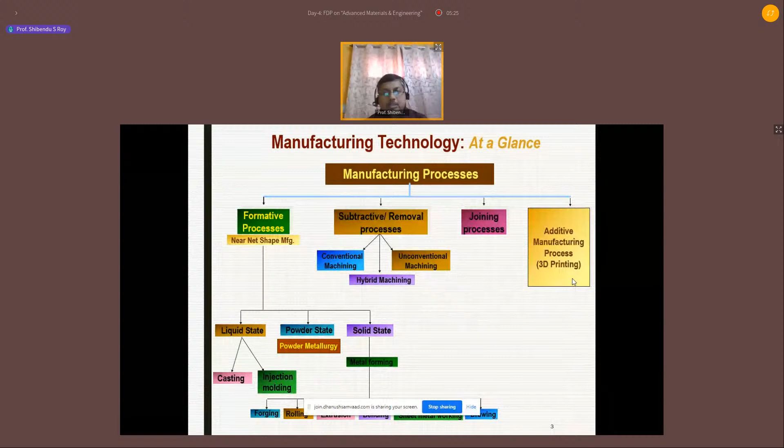Additive manufacturing is the youngest member in the family of mechanical manufacturing processes. It was previously known as rapid prototyping, but now, as per ASTM, its name is additive manufacturing, popularly known as 3D printing. Today's topic is on additive manufacturing or 3D printing processes and the corresponding materials used for this process. This is one of the disruptive manufacturing technologies in the modern era.

Once upon a time, it was a dream for designers or manufacturing technologists to develop a technology with the potential of directly converting CAD data into a real object—a technology that provides the bridge from product conceptualization to product realization in a reasonably faster manner. Now it is a reality through the additive manufacturing process.

It is a process of joining materials or adding materials to create an object from a 3D CAD model, usually layer upon layer. It is opposite to the subtractive manufacturing methodologies. So in additive manufacturing, materials are added and joined layer after layer.

It is very close to the way nature manufactures many things. If you see the bank of a river, you can see that years after years, soil has been deposited and has formed a kind of landscape or island. This is basically nature-manufactured, nothing but adding soil layer after layer. Similarly, in nature, plants, animals, insects, even human beings are basically developed by adding material, not by subtracting material.

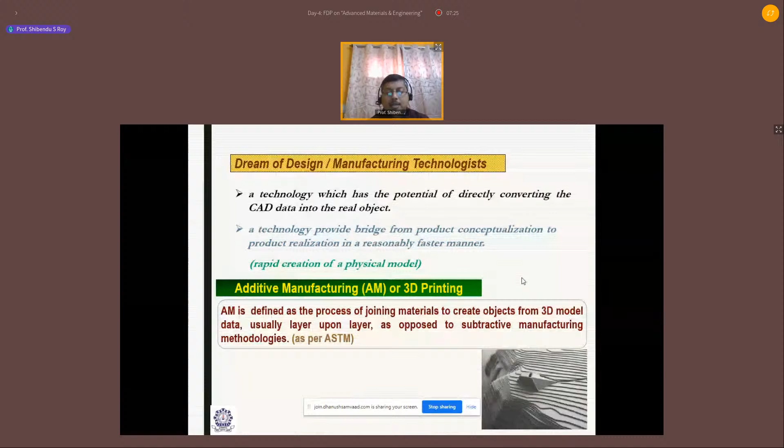Now, if you compare additive manufacturing with subtractive manufacturing, it will be clear that in subtractive manufacturing you have to take a bulk material and give it the desired shape and size by removing material. That removal of material to give the desired shape and size is basically wastage. Most of the time some portion can be recycled, but you can treat this as wastage of material.

In case of additive manufacturing, you add material wherever required, depending on the cross-sectional information. Wherever it's required, you add material, and that is why the wastage is less. This is one of the important benefits of using additive manufacturing.

Now, what is the basic principle of additive manufacturing? It's similar to the way you create a sculpture surface. You can create the sculpture surface by removing material—you take a bulk rectangular piece of material and remove material by a machining process, or by casting, where you develop a mold and do the casting process.

But the other way, you can also develop it like this: you take each cross section, each with a different geometry, cut a cardboard for each, and glue them one after another according to the shape. By adding this cardboard-like layer and gluing one after another, you can develop the 3D object. This simple principle is used in additive manufacturing.

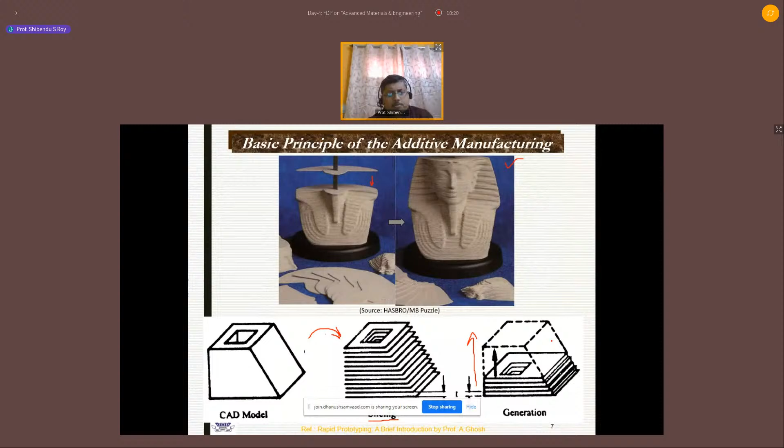This simple principle is used in additive manufacturing process. The same way nature is also developing, adding material layer after layer from bottom to top. Reverse way also you can do nowadays, but generally it is bottom to top.

Now, what are the steps involved in additive manufacturing? First, you have to develop the 3D CAD model of an object. Then you have to convert it into the neutral file format, the STL format.

Then you have to generate the support structure. For overhang structures, you have to put a support, and the support should come from the bottom. For example, whenever you develop a water tank or any cantilever kind of thing in civil structure, you have to give support of different structural members, like scaffold using bamboos or metallic pipes. Similarly here, if there is any overhang structure, you have to give the support in the CAD model itself, you have to design the support.

After designing the support, you have to slice. Slicing means it is the intersection between the solid and the plane. Ultimately, you get the cross-sectional geometry that will be stored into the CAD database. Depending on the height, a particular object may be sliced into, say, 1,000 layers or maybe 50,000 layers.

So slicing means you're converting the solid model into a number of 2D geometries, and that will be stored into the CAD database, and fed to the machine. According to the cross-sectional information, the machine will deposit material over the build platform layer after layer, and it will create the object.

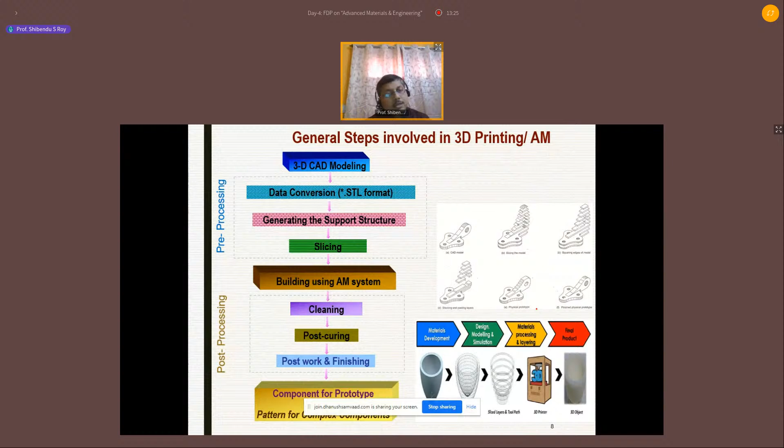Now, if you compare 3D printing, additive manufacturing, also known as 3D printing, with the 2D printing process, as you know, in 2D printing we use it in office and at home. In a 2D printer, we develop a digital model, either in Word or PowerPoint or Paint, whatever it may be. That is fed to the printer, and in an inkjet printing system, there is an ink head.

The head is inside, and it will move in, say, the X direction, while the paper moves in the Y direction. One single layer of ink will be deposited. There's a tiny nozzle, an array of tiny nozzles, through which nano droplets of ink are deposited, and printing is over for only one layer. So there are two movements, X and Y.

In case of 3D printing, you have to develop a 3D CAD model, slice it, and feed it into the machine. Here there is a build platform. Over the build platform, according to your cross-sectional information, since you have already split the model into a number of cross-sections, there is a head, a nozzle, through which material will be deposited.

That head will move in the XY direction, moving in the X direction as well as the Y direction to deposit the material over the bed. Like this way, it will deposit the material. Once one layer's deposition is over by the XY movement of the print head, the build platform is lowered down.

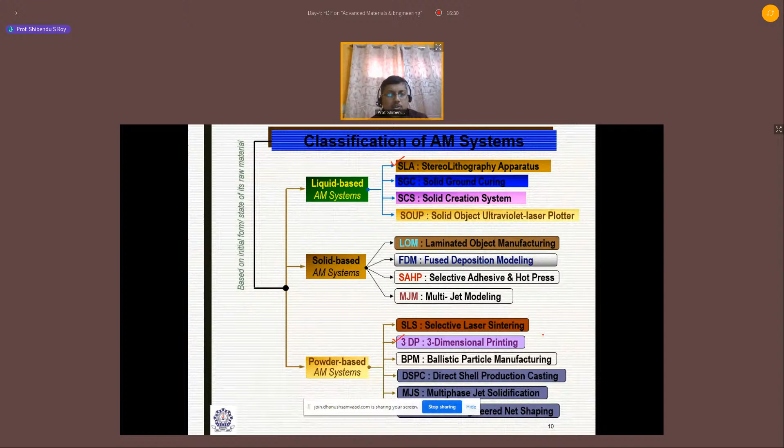But this classification is no longer valid now. As per ASTM, additive manufacturing processes are classified into 7 groups depending on the methodology used for adding material layer after layer. These are: photopolymerization, sheet lamination, material extrusion, binder jetting, powder bed fusion, material jetting, and directed energy deposition. So these are the 7 categories of additive manufacturing process.

I would like to discuss the methodology used in these 7 categories, what materials are used, what are the advantages, disadvantages, and limitations, and what type of research is required regarding the materials or material bonding. So that particular part we like to highlight here.

Now, material for additive manufacturing is used in three categories based on initial state: liquid-based materials, solid-based material, and powder-based material. In liquid-based, there are different types of resin and photopolymer used. Liquid material is used in SLA, SGC, SCS, and SOUP.

There are different solid-based materials, in the form of wire or in the form of a sheet. That is the solid-based material. It may be made of polymer or metal—stainless steel, titanium, or any alloying material. It can also be in sheet form, either paper, polymer sheet, or ceramic sheet. So there are different kinds of sheets used.

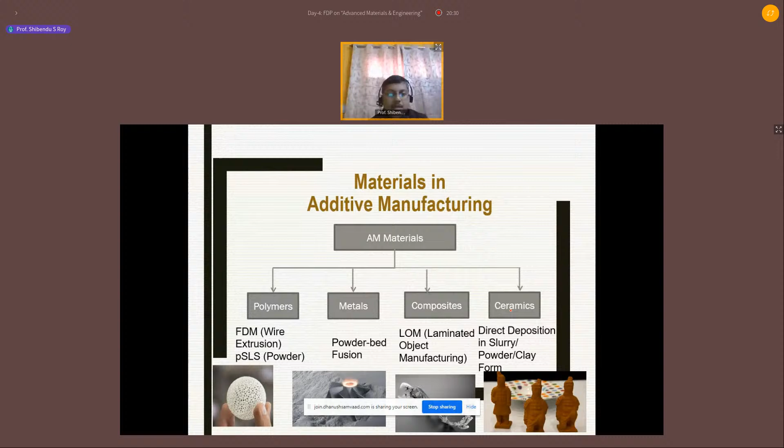Now I would like to show you some applications of the additive manufacturing process. After that, the principle. So quickly, I would like to show you this.

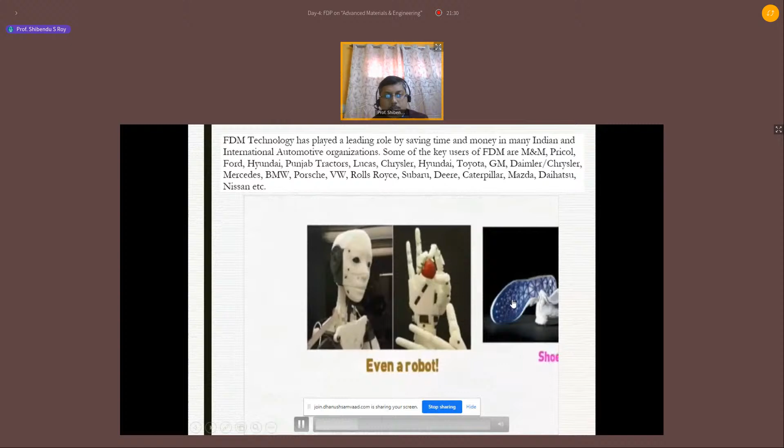You can use 3D printing for art, prototype development, architecture, clothes development, furniture, and lots of gear you can manufacture. Fashion accessories, biomedical prosthetics, in the shoe industry, you can even develop your own robot. So possibilities are unlimited.

Hello, am I audible? Yes, sir, we can hear you. Are you getting the sound of the videos? I'd like to demonstrate that. I don't know whether you're getting the sound. Yes, sir, we are getting sound also.

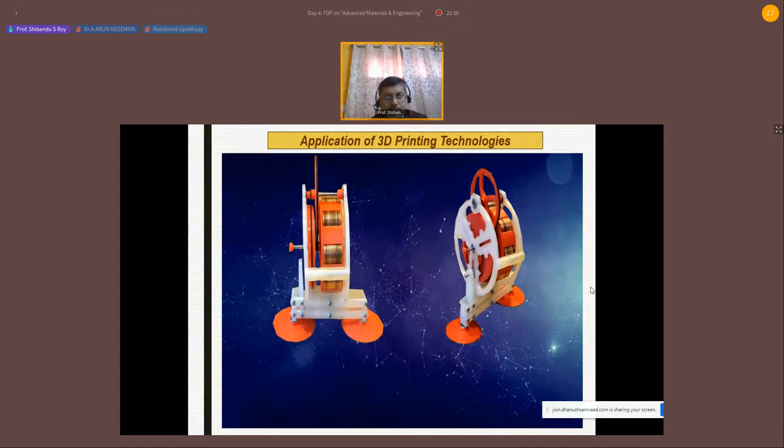So let's take a look at the best 3D printed creations. At number 10, the walking gyroscope, invented back in 1980. Most of the parts of this gyroscope are developed by 3D printing. It houses a spinning gyroscope geared to a pair of walking feet. You can even build your own, since the 3D model can be found on Thingiverse.com, so check the description and click the link to this 3D toy.

At number 9, the CNC multi-tool machine. Although it's not quite a 3D printer, this CNC machine is mostly made from 3D printed parts and is a lot cheaper than your average machine. It can work with woods, plastics, and even some metals. Make sure not to incorporate an AI program into your next 3D printer and create a robot revolution. Like the last object, it can be found on Thingiverse.com.

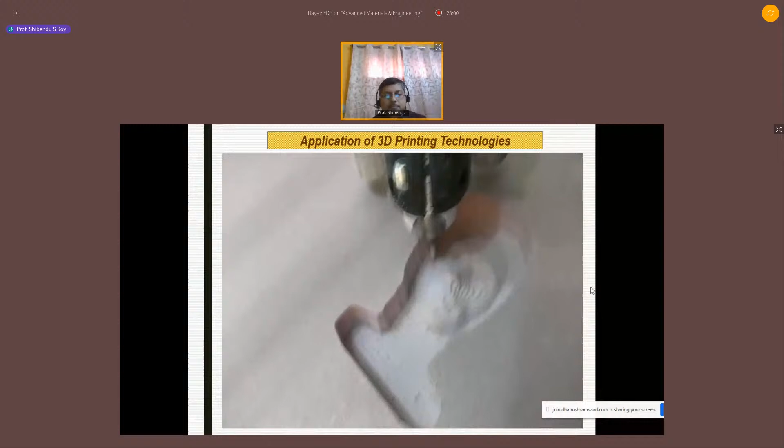At number 8, the Cortex cast. This exoskeletal cast is designed to replace usual plaster forms. It is fully ventilated, super light, shower friendly, and stylish. An injured patient would first undergo an x-ray and then a 3D scan, and then a fully custom 3D cast is printed out. This is definitely innovative and very beneficial to people dealing with an injury.

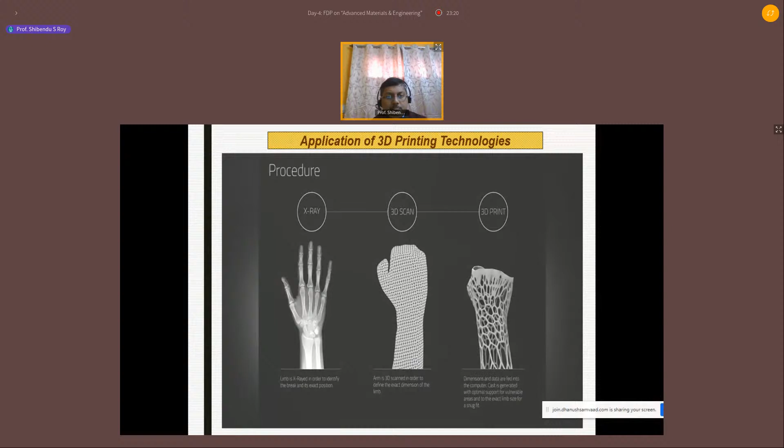At number 7, the dodecahedron speaker. With 3D printing on your side, building a complex speaker box becomes fairly easy to do. This 12-speaker array gives off great sound while being exponentially cheaper than some of its commercial counterparts. I expect to see and hear pretty cool 3D printed speaker housings in the near future.

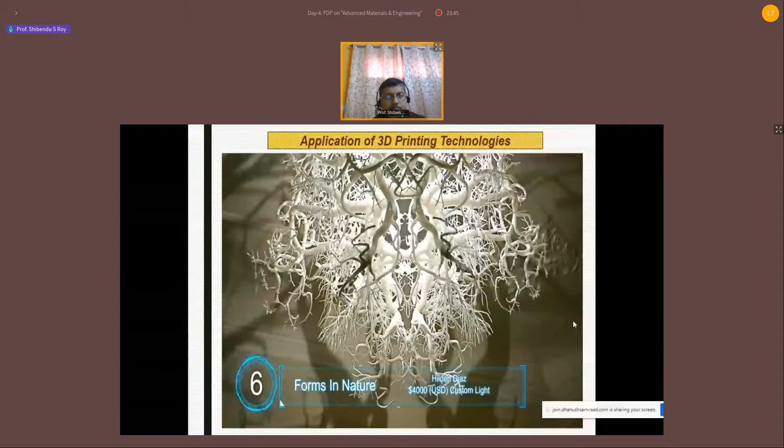At number 6, the Forms in Nature light sculpture. This unique light casts 360-degree shadows onto its surroundings, giving the illusion of being in a forest. New custom 3D lights are being designed and developed all the time, including this Minecraft cube and this jellyfish lamp. So lighting possibilities are endless when it comes to 3D printing.

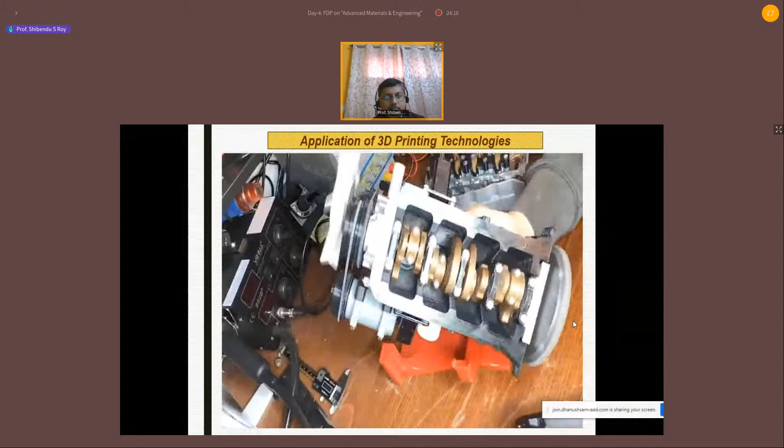At number 5, the 3D printed 22RE 4-cylinder engine. This does not run on fuel like the real engine; it's actually a replica composed of many 3D printed parts. Built by Eric Harrell, you can visit Thingiverse.com and print your own replica engine, but it'll likely take you over 70 hours to print. Every part moves, and it's driven off an electric motor. And if this is not crazy enough, the same creator even built replicas of a 5-speed transmission and a transfer case. So that's pretty crazy.

At number 4, the Local Motors 3D printed car. Most of this car is composed of ABS plastic reinforced with carbon fiber. Its frame, exterior body, and interior features only take about 40 hours to be 3D printed. Its mechanical components, consisting of battery, suspension, and brakes, are not 3D printed but added on after. It's a fully electric car with a top speed of 50 miles per hour, expected to be released next year. At number 3, a real 3D printed jet engine.

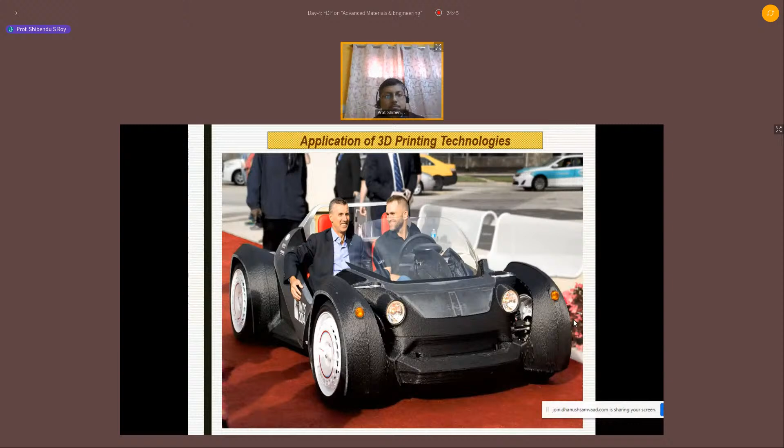The metal 3D printing engineers at Monash University created this new engine, proving that 3D printing methods can cut costs and production times. Its creators are hoping to test fly a prototype within 10 months. If everything goes well, commercial certification will be awarded in the next 2 years. 3D metal printing is fairly new and will not only improve engine building times for the aviation industry, but also for the automotive and marine sectors.

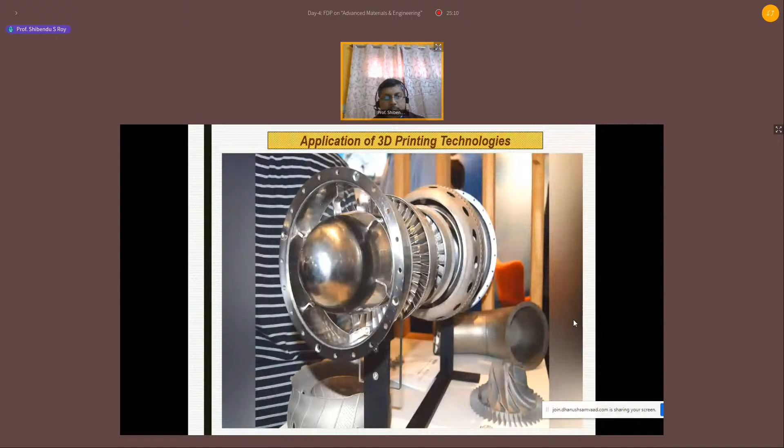At number 1, the 6-story printed apartment building, built in China by WinSun. It's a 3D printed structure. Such type of building can also be developed in India, as in the last few months, through additive manufacturing or 3D printing processes.

Now I'd like to talk about the oldest of the old additive manufacturing processes, laminated object manufacturing. Quickly, I'd like to tell you about it.

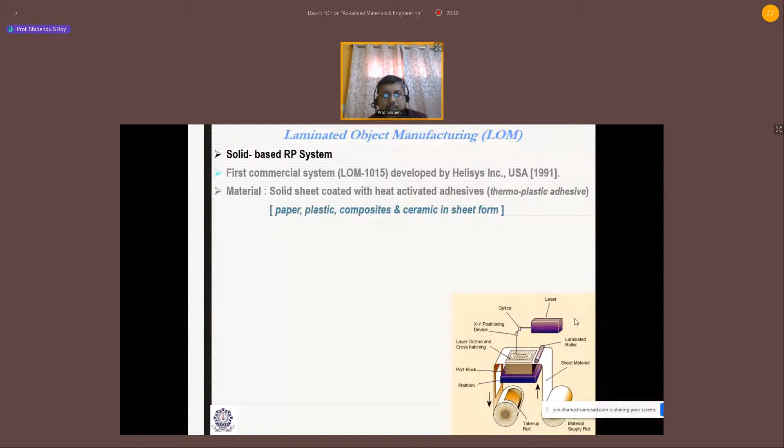The material used is a solid sheet coated with a heat-activated glue, or thermoplastic adhesive. It may be paper, plastic, composite, or ceramic in sheet form, with thickness 0.05 to 0.25 millimeters.

The process involves laser cutting and lamination by hot roller compression. The laser used is CO2. Here is the build platform, the roll, and the take-up roll placed over the build platform. This is the laser, which has XY control.

According to the cross-sectional information of the object, the laser traces the path. It traces the cross-sectional outer boundary, inner boundary, and an outermost rectangular boundary, which is required whenever the platform is lowered down. The whole rectangular portion lowers with the platform, and you see the unwanted portion. Only the annular circular portion is the actual cross section, the rest is cross-hatched so that the unwanted portion can be easily removed.

Once one layer is over, the platform lowers down equal to one layer thickness, and the take-up roll starts so a fresh paper comes over the previous paper. The hot roller moves over it, applying temperature, heat, and pressure. Below the paper, on the backside, there is a glue—the thermoplastic adhesive. Because of the pressure and temperature, it activates and adheres to the previous layer.

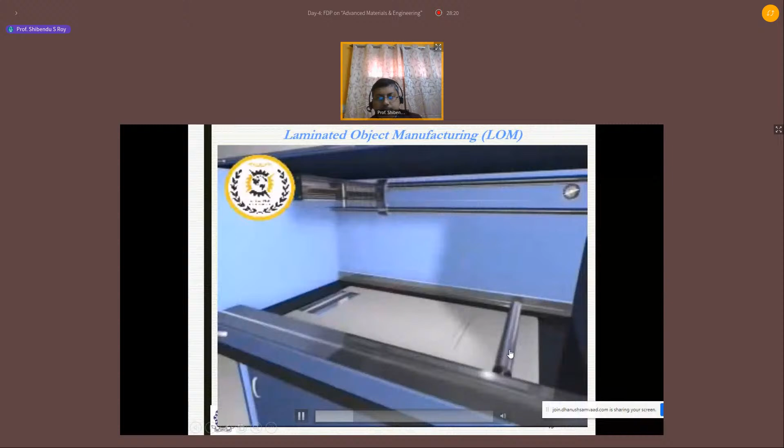Quickly, I'd like to show you this process: the tracing of XY movement of the laser, hot lamination, laser cutting, then the fresh paper and pressing—this is basically the lamination process.

Ultimately, you get something like this, and because of the cross-hatched small tiles, you can easily remove the unwanted portion. For example, you get this box and can remove the unwanted portion this way to get your part. But here the material wastage is more, which is why this process is now obsolete.

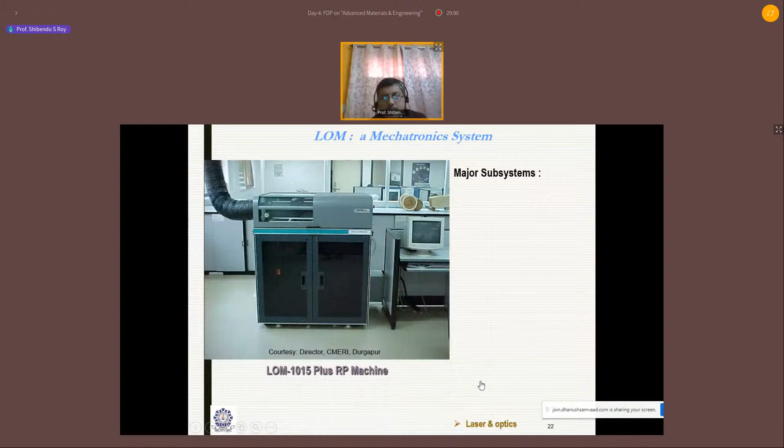This is the machine which was procured in this same area, Durgapur, long back in the year 1998. This is the LOM process. Now let's look at the modern machine.

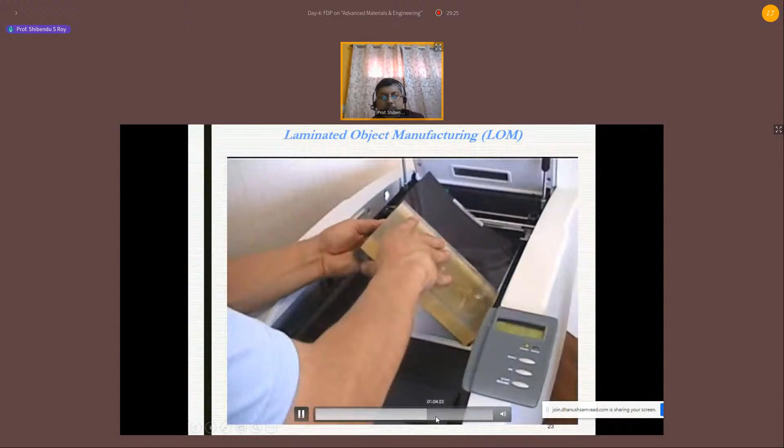The modern machine is like this. Here you see the XY movement, and a plastic sheet is used. Once it's over, with layer by layer addition, you get this, remove the unwanted portion, and ultimately get your object.

Now I'd like to tell you about the first additive manufacturing method in the world, using the photopolymerization process. This is stereolithography apparatus, SLA, developed by Professor Hull, who commercialized it in 1988. He is the founder of 3D Systems, and this is the first additive manufacturing machine, or first 3D printer, in the world.

This is a liquid-based additive manufacturing process. Photocurable resin is used, either epoxy resin or acrylate resin, and a laser is used for curing.

Now let's look at the process—it's simple. This is the build platform, initially positioned at this point, with one layer of liquid resin over it. According to the bottommost cross-sectional information, the laser traces the path.

In this case, the laser doesn't only trace the outer path, it also traces inside, so that due to the interaction of the laser and the liquid resin, the photopolymerization process starts. Because of this, it cures the whole desired cross section, while the other portion remains uncured polymer over the build platform.

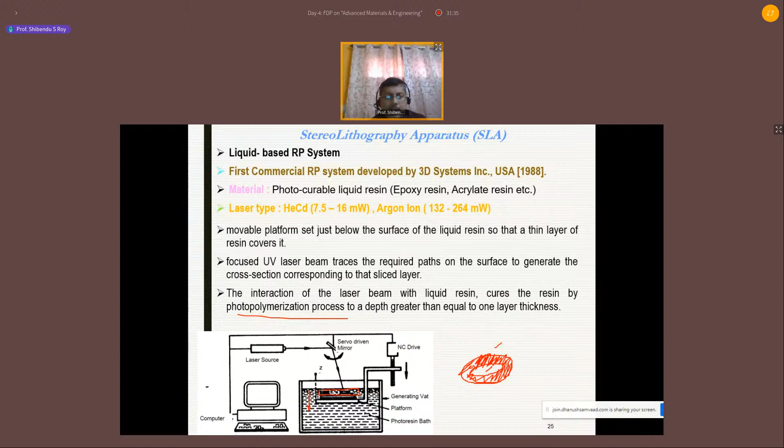Once one layer is over, the platform is lowered down equal to one layer thickness, and the liquid resin from the surrounding will cover the previously cured layer. In order to uniformly distribute resin over the previously cured layer, a wiper blade is used. Once the second layer is ready, the laser will trace the cross-section according to the second layer's information, and laser power is controlled so it not only cures the second layer but also creates bonding between the second layer and the first. This process continues till the topmost layer is reached.

And this is the machine, and I can show you a little bit of this.

See, this is the laser tracing taking place. You just see the laser tracing, then the platform is lowered down, then the wiper blade moves, then again the second layer is traced, and this process continues till the topmost layer comes.

Once it is done, the platform moves upward and the partially cured solid object is obtained. Now you have to do some post-curing operation to make it fully cured, and these are the products developed by the SLA process.

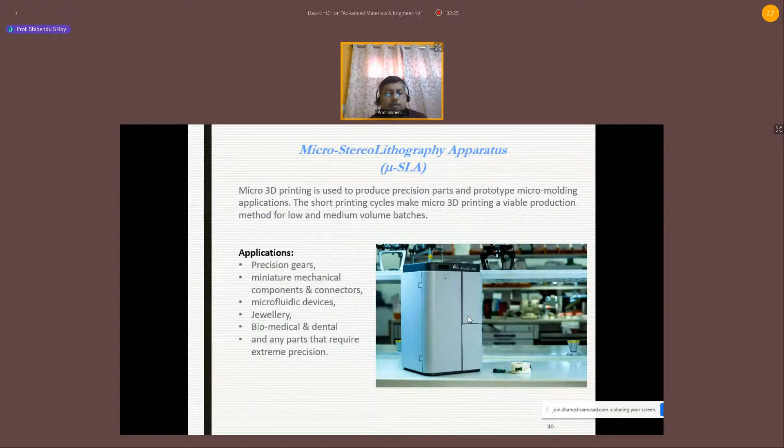So these are the micro SLA, micro parts, like biomedical parts or precision gears, manufactured by the micro SLA process. I'd like to show you examples of micro SLA.

So it is mostly used in dental applications.

Next, a very common additive manufacturing process is the material extrusion based method, FDM, fused deposition modeling. Most colleges and academic institutes have this one because it's relatively low cost, and it has relatively low running or recurring cost.

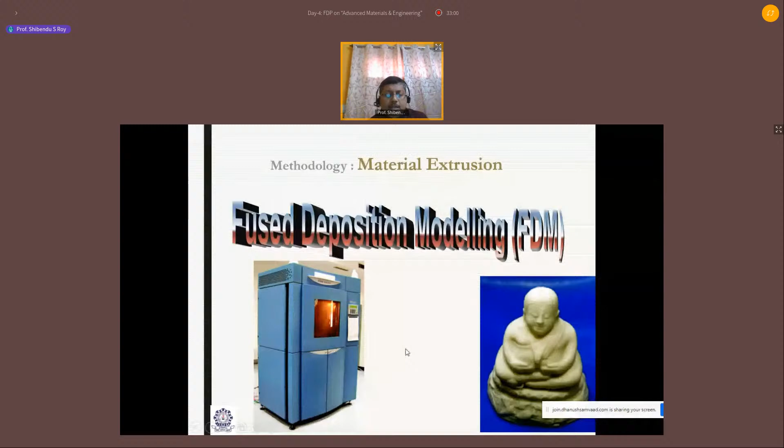It is a solid-based additive manufacturing method. Here the material used is different kinds of polymer, ABS or PLA or any kind of elastomer. The first machine was developed by Stratasys, and I'd like to explain the basic process here.

This is basically the nozzle, the building nozzle, and the input material is in the form of a filament or wire. The diameter is 1.75 millimeters, and that is fed into the temperature-controlled, X-Y position-controlled extrusion chamber.

The process is very simple. Because of the feeding roller, the filament is continuously fed into the nozzle, and because of the temperature it becomes semi-solid, and because of back pressure it comes out from the nozzle, which is 0.4 millimeters in diameter. A thin layer is deposited, and the nozzle has to move in the X-Y direction to deposit material according to the cross-sectional information.

Once one layer's deposition is over, the platform is lowered down equal to one layer thickness, then the second layer is deposited according to the second layer's cross-sectional information.

This process is sometimes jokingly called a jalebi-making process. In jalebi making we are doing the same thing - there's a nozzle, a cloth is basically the nozzle with a hole, and by hand we give back pressure and control the X-Y movement to get the desired shape of the jalebi. So it's that simple a process.

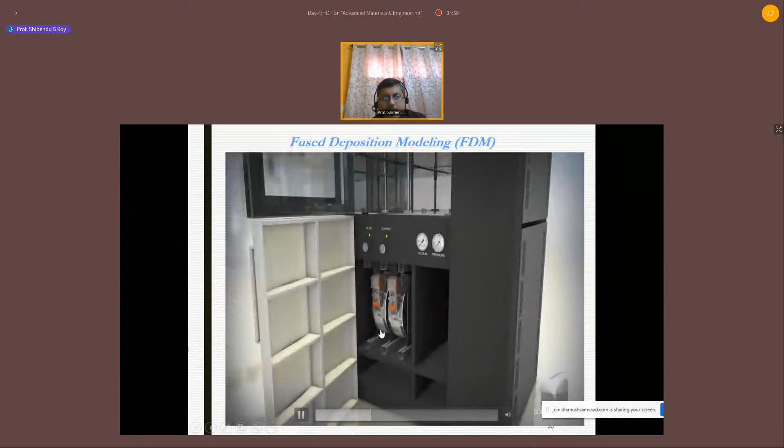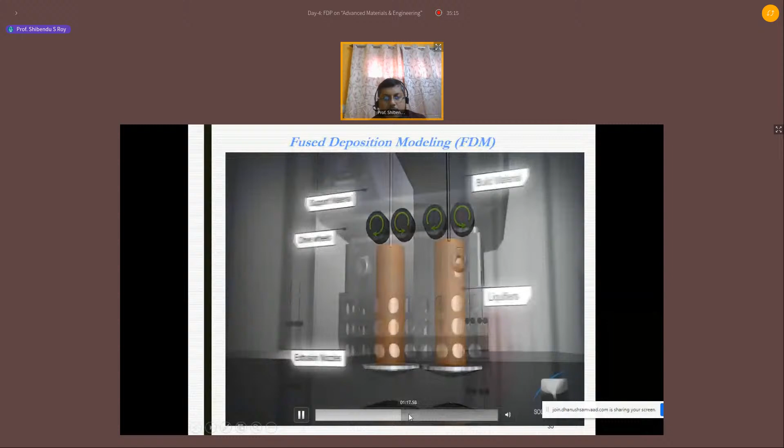One is the build material, another is the support material, which you have to remove. Spools of thermoplastic and support material are used to create each cross-section of the part. Similar to a hot melt glue gun, uncoiled material is slowly extruded through dual heated nozzles. The extrusion nozzles precisely lay down both support and thermoplastic material upon the preceding layers.

So the white one is the support material. See, this is the overhang structure, the black one. So the white support material is required there.

The extrusion nozzle continues to move in a horizontal X-Y plane while the build platform moves down, building the part layer by layer.

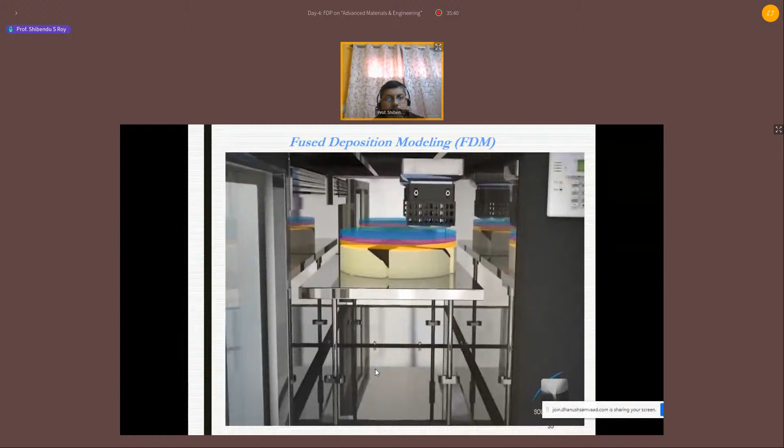The finished part is removed from the build platform and cleaned of its support material, removing the support for the overhang structure. So this kind of post-processing is required.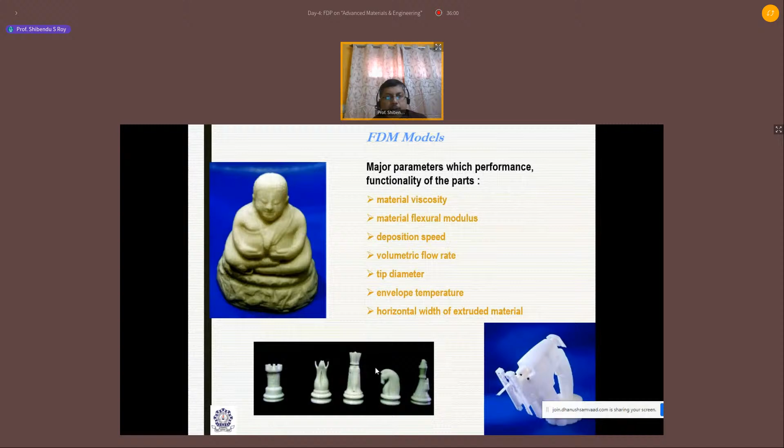The next one is powder-based fusion, one of the most promising additive manufacturing processes - the selective laser sintering process. It is powder-based, using different kinds of powders: polycarbonate, nylon, wax, glass-filled nylon, powder-coated metal, and ceramic. The process is sintering, and it is a very well-known process.

So it will apply focused heat to fuse the powder on the surface, and it will adhere with the nearby powder. This process is similar to SLA, selective laser.

Instead of liquid resin, here it's powder, and the powder will spread. One layer of powder spreads over the build platform, and the laser traces the path in such a way that it sinters the material in that particular layer. Once one layer is over, the build platform is lowered down equal to one layer thickness.

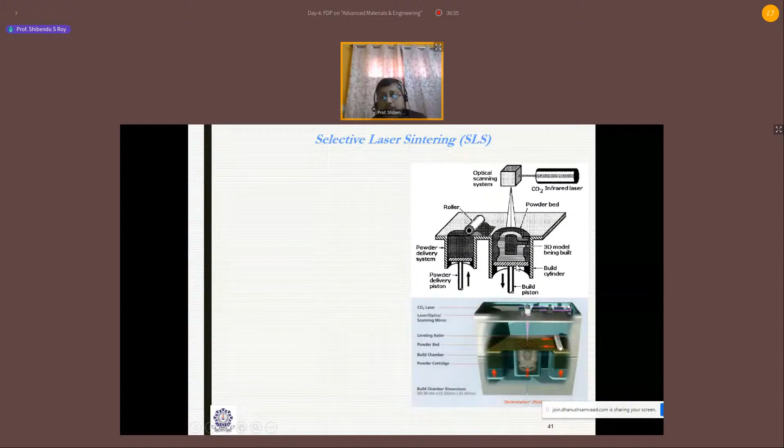Then the second layer of powder will spread. Again the laser traces the path according to the second layer processing information, and laser power is controlled in such a way that it not only sinters the second layer but also creates bonding between the second layer and first layer. This process continues till the topmost layer is reached.

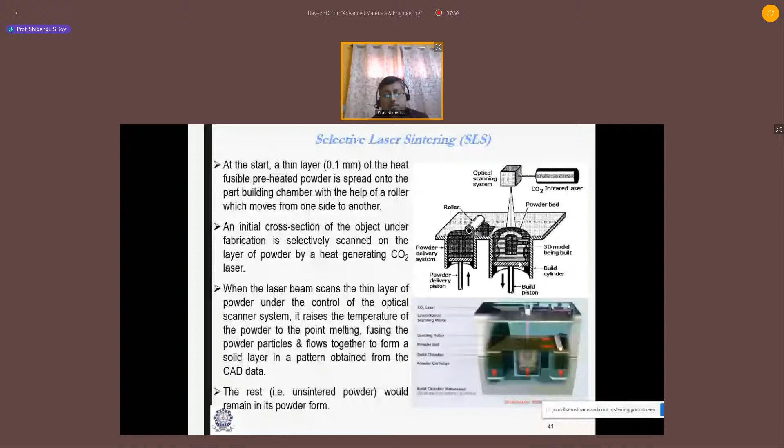So the difference between SLS and SLA: in SLA there is liquid, and in SLS there is powder. The other aspects remain the same, the process remains the same. Unsintered powder could be reused, so the wastage here is very less. I'd like to show you this in the video.

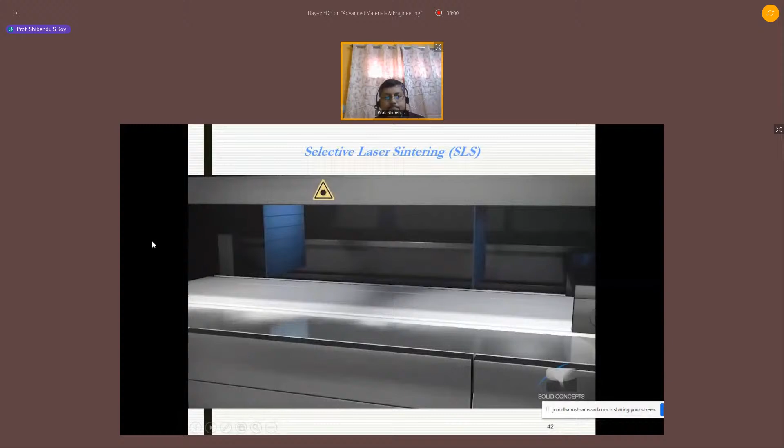Cross sections or layers: the data is then transferred to the SLS additive manufacturing equipment. The machine then begins to create the first layer. After a leveling roller spreads a thin layer of powdered material across the powder bed, a CO2 laser traces the cross section of the material. So this is the tracing material, deposition of powder, then scanning, laser scanning.

Once a single layer is complete, the powder bed is lowered to make room for the next layer. More material is introduced in a powder cartridge and rolled out smooth, while unused material is recycled. The process is repeated, building layer upon layer until the part is complete. So this is the process, layer after layer.

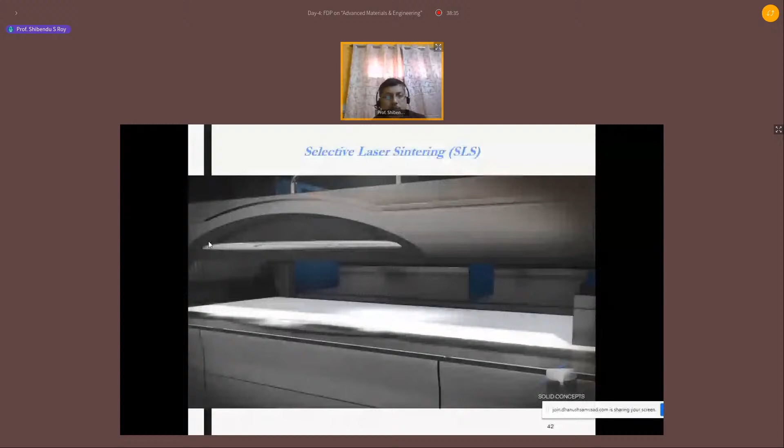These sections act as cross-sectional information fed into the machine, telling the equipment exactly where to sinter. The laser then draws a 2D cross section on the surface of the build material, heating and fusing the material.

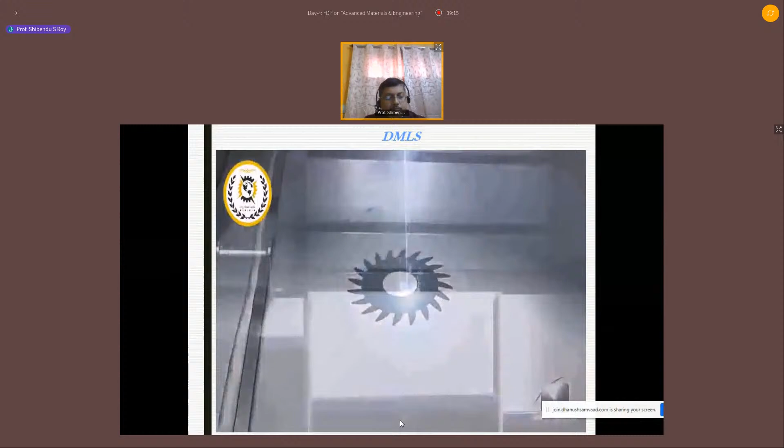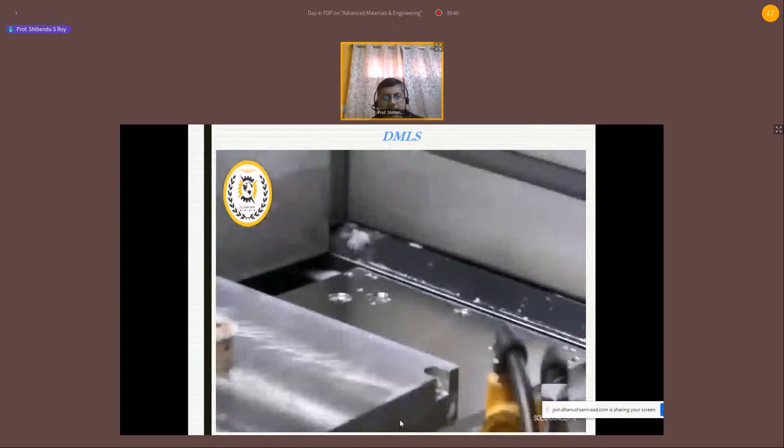Once a single layer is complete, the base plate is lowered just enough to make room for the next layer. More material is raised into the cartridge and recoated evenly on the previously sintered layer. The DMLS machine continues to sinter layer upon layer, building from the bottom up. As the part is built, support structures are added to give supplemental strength, fine features, and overhang support. This way, by adding material layer after layer, you can develop any complex shape object, even a metal object.

So next is the binder jetting principle. Here the difference compared to SLS is that instead of laser, glue will be deposited through a tiny nozzle, and instead of laser fusing, the glue will adhere the powders, whether metal powder, ceramic powder, or any polymer powder. This particular product has been developed by MIT in Boston. As you see, this is the glue depositing head.

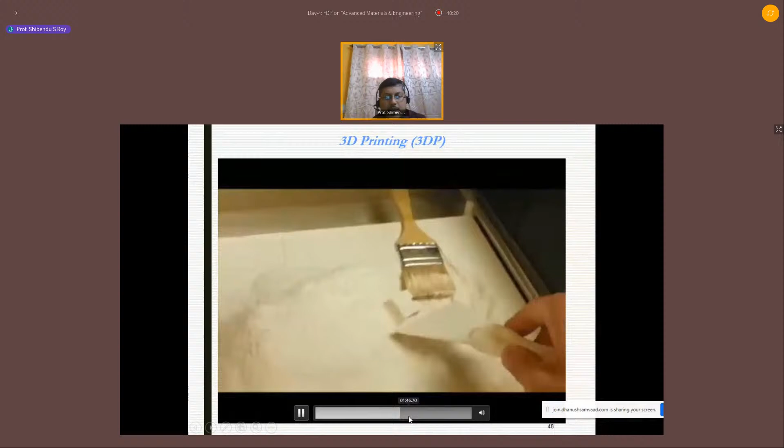Binder jetting principle: instead of laser, binder will be deposited according to the desired cross section. One important application of the binder jetting principle is in the foundry industry. You can develop the sand mold directly instead of making the pattern, which reduces the process cycle. This is one of the very important and promising applications of the binder jet additive manufacturing process, to develop 3D printed sand molds.

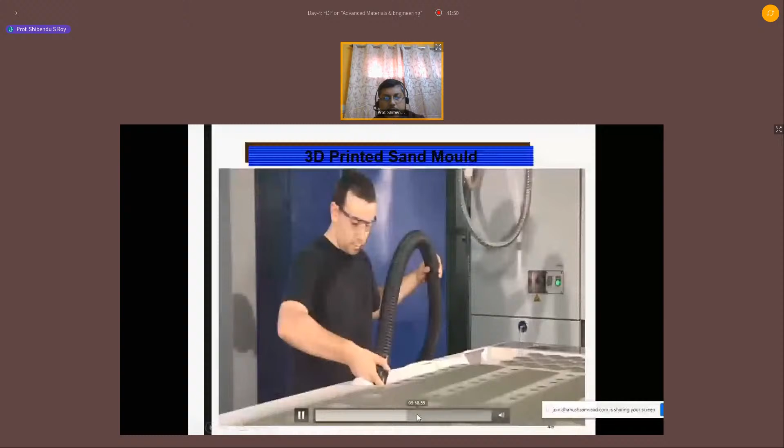I'd like to show you this a little bit. This is the spraying of sand powder. Then, according to the cross-section information, glue is spread over the sand powder bed. This way you can develop the 3D printed mold and carry out the casting operation.

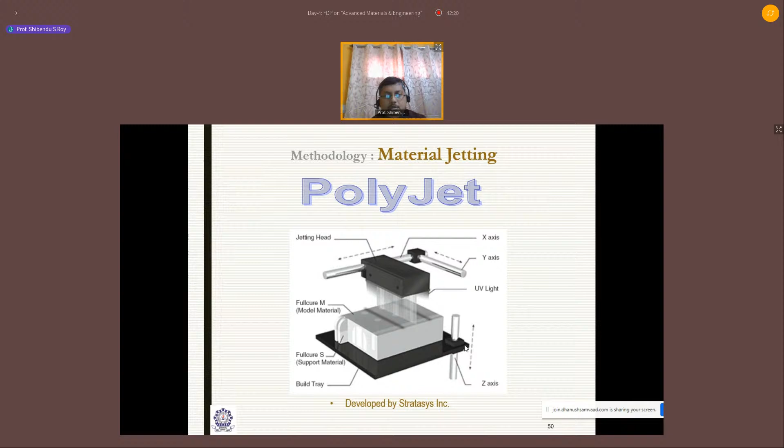So patternless casting is possible nowadays. Next category is material jetting. Here, instead of glue jetting, liquid polymer will be jetted in a controlled UV environment, and as it is deposited in the UV environment, it will cure. This is polyjet, where the material is deposited from a tiny nozzle - the material jetting process.

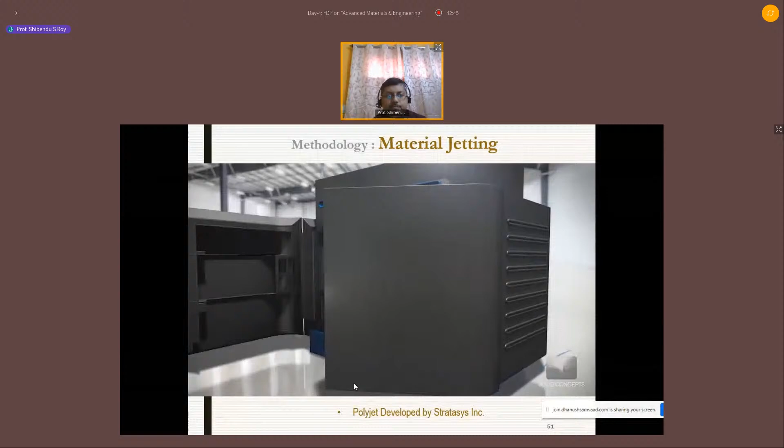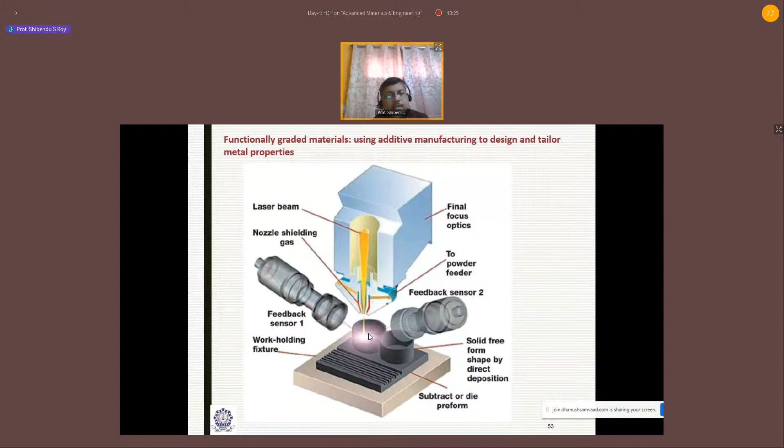Another thing that's very popular nowadays is the metal wire based method. It's basically a welding based additive manufacturing process, known as wire arc additive manufacturing. It's similar to the welding process - metal wire is used along with a welding principle, either TIG, MIG, laser beam, electron beam, or plasma arc - any methodology where the material will melt and deposit. This is wire arc additive manufacturing for metal.

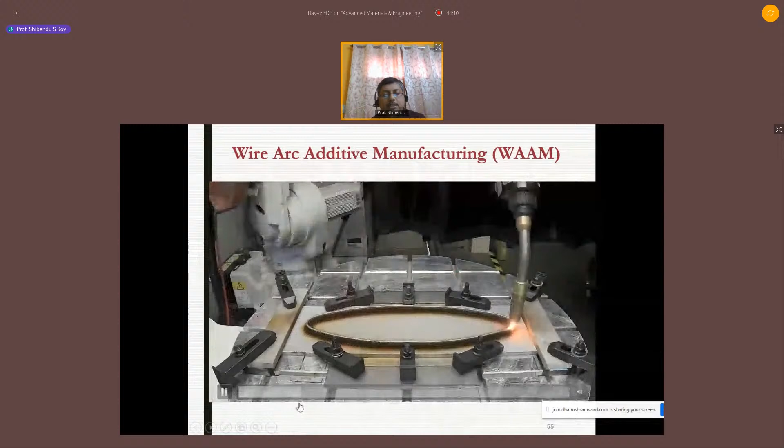So this is the process you just see - the robotic welding process has been modified into the wire arc additive manufacturing process. This is another promising additive manufacturing process where you can make metal parts, or it can also be used for repair of a part. This is an example of robotic additive manufacturing.

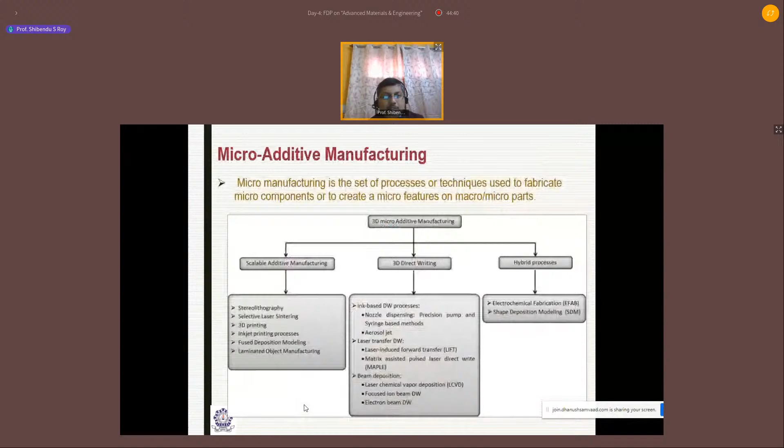I'd like to skip some additive manufacturing for this level. Inkjet printing systems are used in micro and nano additive manufacturing processes for flexible electronic devices, PCB making, and MEMS device development. These are the applications of inkjet printing systems.

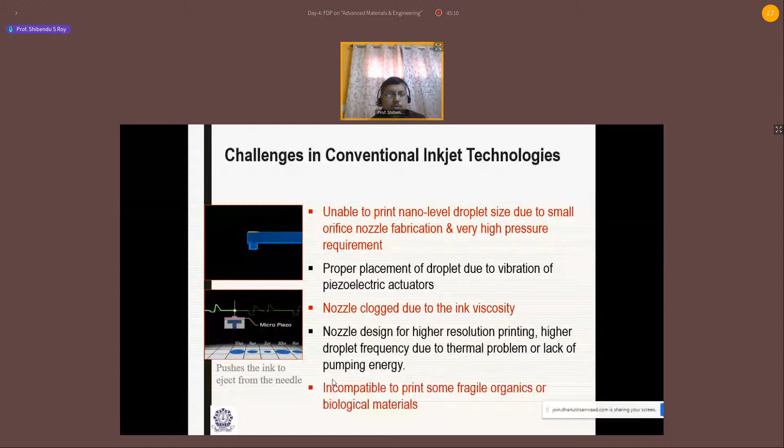Inkjet printing systems include thermal inkjet and piezo inkjet - we have developed one setup. This is an example of the piezo inkjet principle, but there are drawbacks in conventional thermal and piezo inkjet that can be eliminated by electro-hydrodynamic inkjet printing. We developed this setup in our DST project in collaboration with CMERI Durgapur and NIT Durgapur. In this process, an electric field is used between the nozzle and substrate to pull ink from the nozzle and create nano droplets.

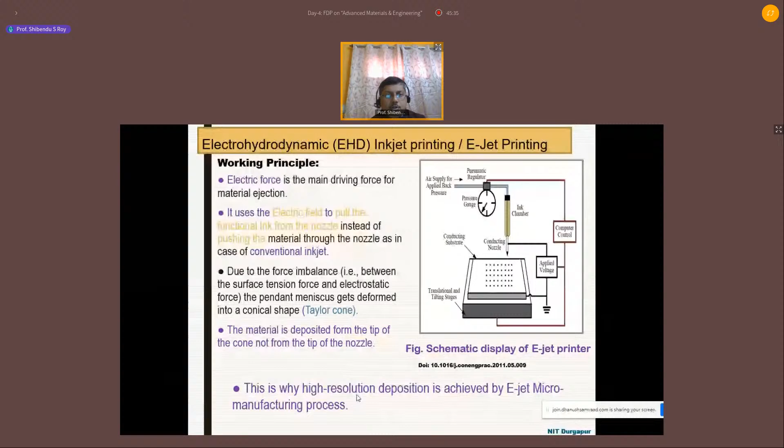The ink used is graphene ink. I think in your lecture schedule there's a topic on graphene by Professor Himadri Chattopadhyay, so you know what a wonderful material graphene is. Here graphene ink has been used to print flexible electronics, displays, and sensors we have developed. These are the application areas: thin film displays, flexible electronics, sensors, automotive, and aerospace.

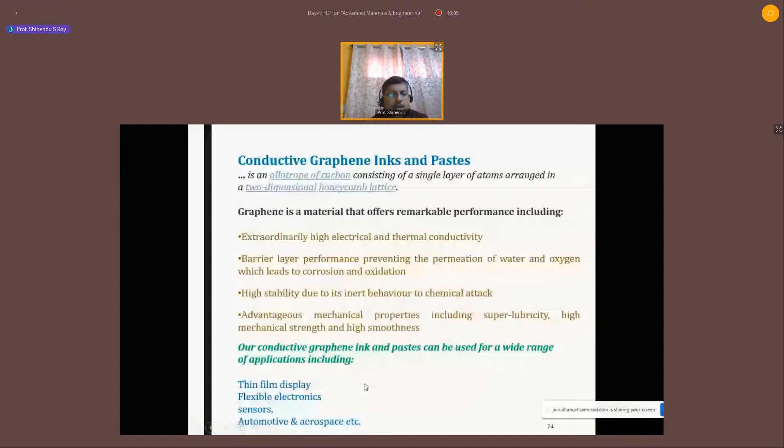Now, these are the materials used in additive manufacturing. Metals include plain carbon steel, tool steel, stainless steel, aluminum alloy, nickel based alloy, titanium, and copper. This material is used either in wire form or powder form. Newer and newer alloy materials are now being developed for additive manufacturing. Truly speaking, till date there is a material limitation in additive manufacturing.

Polymer is used, as you've seen in different processes. There's also use of sand, ceramic, and wax. These are material options, and obviously additive manufacturing is used nowadays in the biomedical sector, so biocompatible material is also important. There's polymeric material, metal, ceramic, and also composites used. These are different areas where a lot of research is required to make additive manufacturing more effective - zones like ceramic-polymer composite, ceramic-metal composite, and metal-polymer composite.

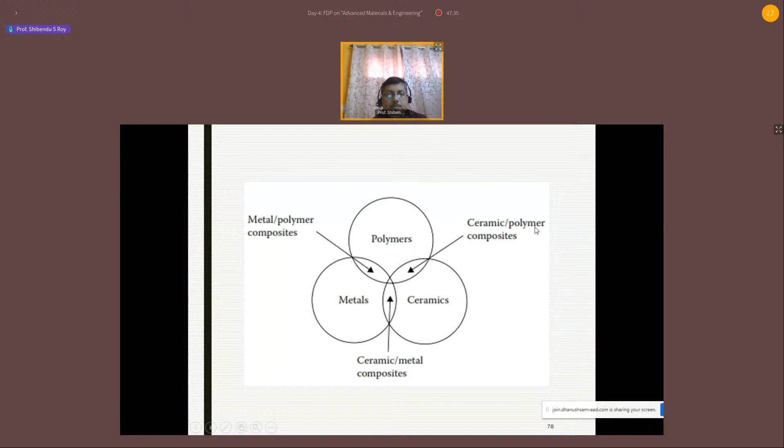Polymers used are thermoplastic polymers like ABS, PLA, and different nylons. These thermoplastic polymers are used in the FDM process. In most colleges you can see FDM printers used for this, and along with FDM you can use different carbon fiber and composite materials. Composite 3D printing is available based on the FDM process, using both thermoplastic polymer and carbon fiber to make composite 3D printing.

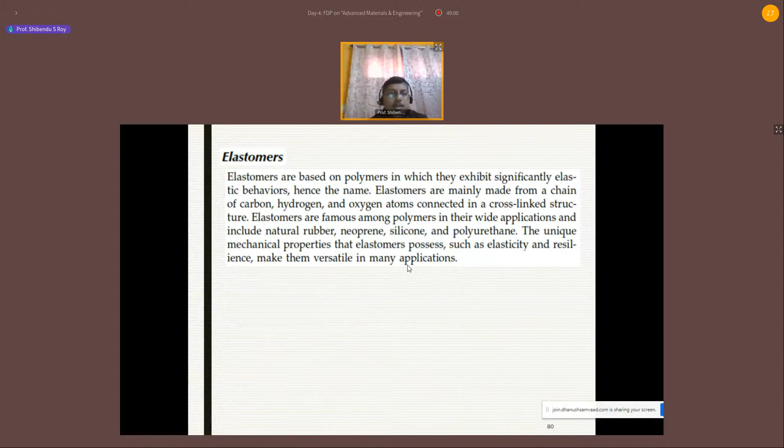Thermosetting polymer is also something people are thinking about nowadays - used for composite printing, mostly in space research and defense. Both ISRO and DRDO are trying to develop additive manufacturing systems using thermosetting polymers. Elastomer is another material used in additive manufacturing - we have used elastomer, polyurethane, in product development using fused deposition modeling. We developed a 3D printed mask in NIT Durgapur made of elastomer.

Previously we developed the ABS based mask, but it is rigid. We need some flexibility, it should be flexible enough and soft. So we replaced the ABS with polyurethane elastomer, which can take the shape of your face. It is relatively more user friendly with respect to the skin and face movement during talking. This is another interesting application of elastomer for 3D printed masks in this COVID situation.

These are the different materials used in the very popular additive manufacturing process FDM, like PLA and ABS. They have a lot of flexibility and are easily available, and can easily extrude. But whenever flexibility is required, PLA and ABS are not good. That time you have to go for an elastomer like PU, polyurethane, which is relatively better when flexibility is required.

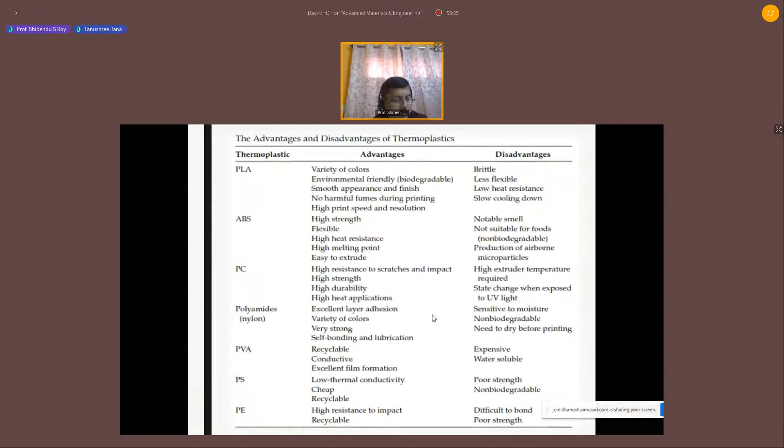Now there are metals, different types of metals, ferrous and non-ferrous, used in additive manufacturing. Non-ferrous materials like aluminum, nickel, copper, magnesium and their alloys. Ferrous materials like stainless steel and different types of alloy steel are used either in powder form or wire form, in SLS, DMLS, or wire-based additive manufacturing process.

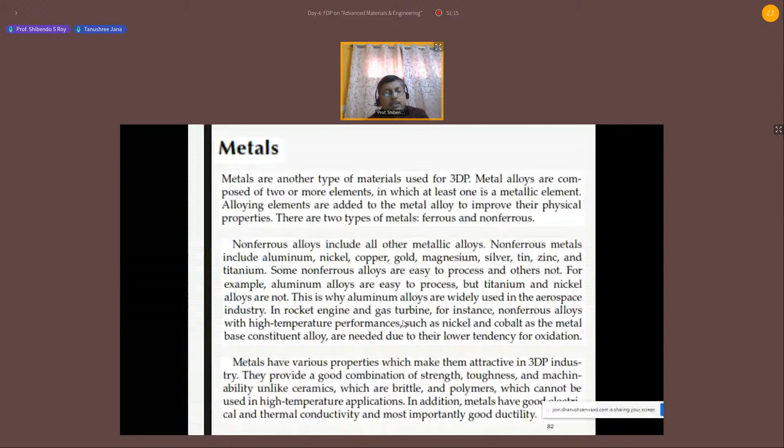Metal obviously has good strength, toughness, machinability, but till date the surface finish in metal additive manufacturing is very poor, and you will not get the strength achieved by metal forming processes. In powder based methods you can use polymer powder like thermoplastic, polymer composite, nylon or elastomer. Metal powder can also be used, and ceramic is also used in powder form.

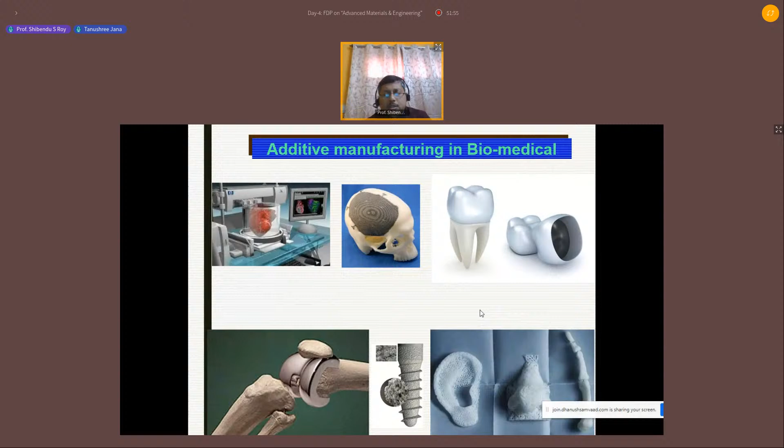Ceramic is used in biomedical and other structural applications. One important application in additive manufacturing is the biomedical sector: implant development, dental applications, and orthopedic applications. Different bio-friendly materials are used here. Biomaterials are used either in powder form, added by laser or by adhesive or glue, or used in wire form. Titanium-based and magnesium-based biomaterials are two promising ones, along with stainless steel and bioceramic.

Another important area is bioceramic-based material for implant and scaffold development. A lot of research is required in this area because here mass production is not required, mass customization is required, since implant geometry differs from one patient to another. For example, knee replacement geometry differs from patient to patient, so you cannot mass produce that part.

Hello, hello. Sir, the next speaker is waiting, could you please complete? I will just conclude, I'd like to conclude.

Another important area is functionally graded materials, where different layers have different properties, which is possible through additive manufacturing. These are the unique capabilities of additive manufacturing: you can build any complex geometry and develop any complex material structure like functionally graded material components.

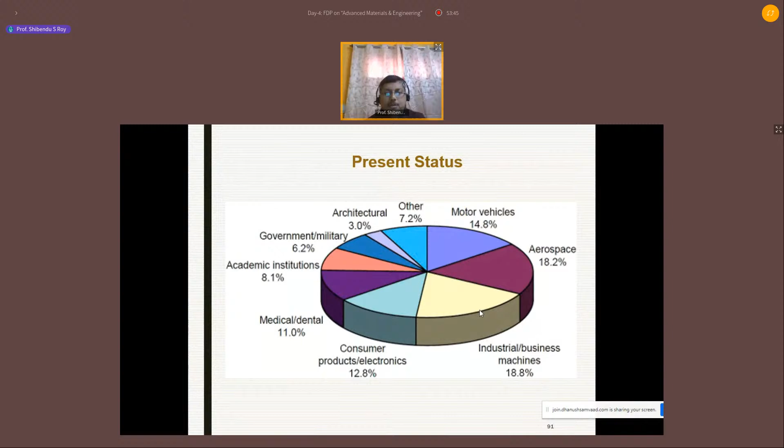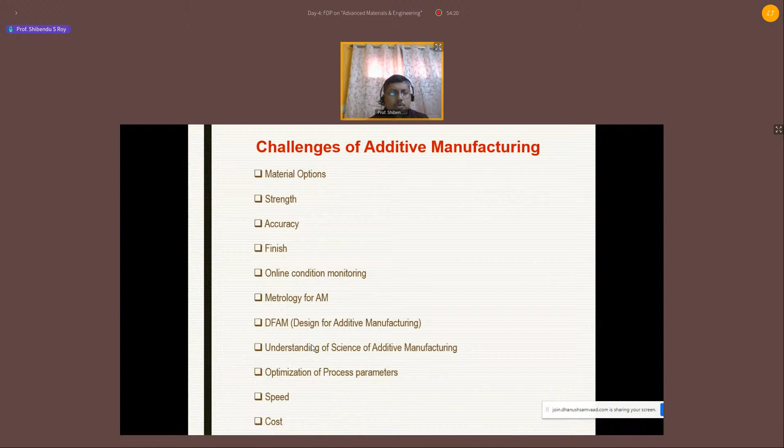But there are challenges in additive manufacturing. Material options are still limited, strength is not comparable to conventional manufacturing, and accuracy and finish are also not good till date. A lot of research is required in this area, and similar challenges exist in micro and nano additive manufacturing, which are future research areas. You have to synthesize newer materials for additive manufacturing, because material properties at macro scale and nano scale are completely different, and you have to take advantage of materials in additive manufacturing process.

So we have to synthesize new materials to get better strength and better surface finish of the product by additive manufacturing process. Along with that, process modeling and optimization is another important area, because material and material processing is very important. So process modeling and process optimization is the future research, in order to develop our indigenous additive manufacturing process. Material research is much more important than the mechanical and electronics portion. As far as my knowledge is concerned, material modeling and material development is very much important in respect of the development of indigenous additive manufacturing process.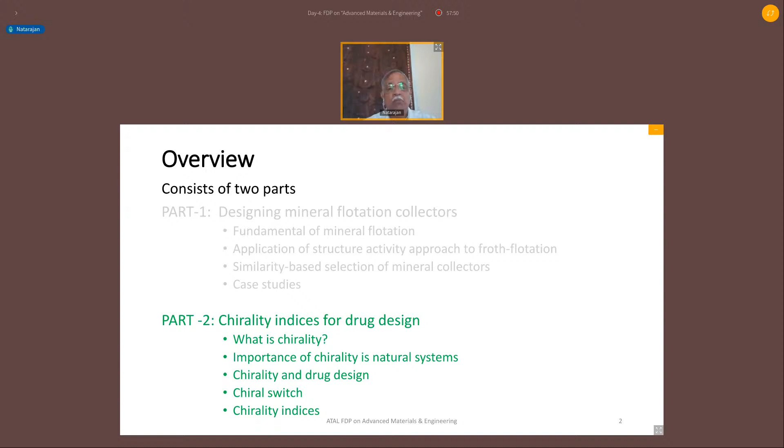Good morning to everybody, and I thank you for the opportunity given to me to present my lecture. I'm sorry that in my last session there were some technical glitches, hence I could not complete my lecture. Anyway, the first part was completed. To recap, I am just going through the first part again, a little bit of it, not much of it. So the computer-aided drug design of flotation collectors, we finished in the first part, and I will be concentrating more on the second part, that is application of mathematical chirality descriptors in drug discovery. The overview was presented there.

Last session, I presented molecular similarity clustering that is extensively used in drug design. We try to extend it for the synthesis of flotation collectors, because flotation collectors are very important in mineral processing. If the collector can concentrate mineral using a very small amount, that will reduce the chemical consumption in the further downstream stages. We were very much interested in synthesizing new collectors, as there was no scientific method to develop new collectors. Actually, many of them were tried by trial and error. So we wanted to develop a better approach.

That is how we chose a well-proven method, namely similarity-based clustering, which has been extensively used in medicinal research. We used that method, and as I explained, we converted molecular structure into molecular descriptors, and using the descriptors, we cluster them. Once we cluster, we can separate from each cluster. That means similar molecules are clustered together, like birds of the same feather flock together. Compounds which are very close in molecular structure will come into the same cluster. Now, if we want to synthesize 10 compounds, we make 10 clusters, and from each cluster, we take one compound and check it. Or if we want even 20 compounds, we select one from the farther end, one from the middle, so that we select 20 compounds and do the synthesis.

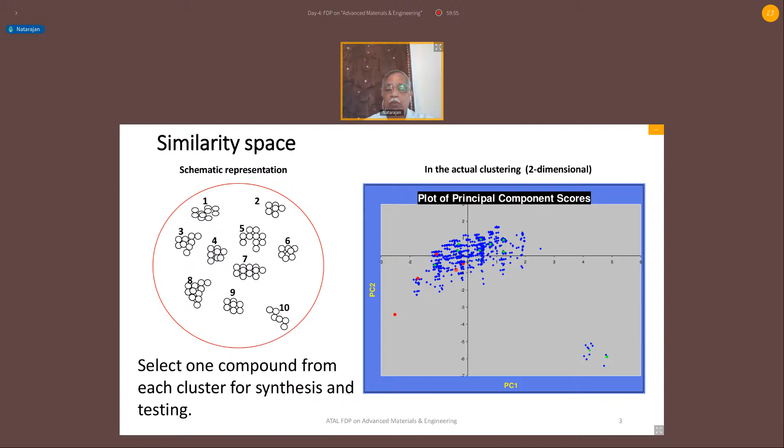What I have shown here is a hypothetical structure space, a similarity space. But in the real field, when you do the analysis, the cluster of structures will look like this. From each cluster, we select one compound, and that will be synthesized and used. That is the outline of the method.

We tried to synthesize a new type of collector for the flotation of sphalerite, a zinc mineral, because zinc minerals need at least 1 kilogram of copper sulfate per ton of ore to get concentrated. Copper sulfate is a very expensive and corrosive chemical, and we wanted to eliminate or at least reduce its consumption in the flotation process. So instead of just going by trial and error, we developed a structural database of 1,000 compounds.

From the 1,000 compounds, by molecular similarity, we selected 20 compounds, and of those 20, one was found to be the best performing collector. It could float the zinc mineral sphalerite using only a reduced amount, half of the amount of copper sulfate. However, it also floated the iron mineral pyrite along with sphalerite.

When sphalerite concentrate is contaminated with pyrite, the value of the concentrate goes down, at a rate of $1 per ton of ore. Therefore, pyrite coming up in the concentrate is a detrimental factor.

Though we found a scientific method for synthesis of collectors, the collector we synthesized is not very selective for zinc. So we wanted to try the next series of collectors, and for that we asked: what should be the base or skeletal structure? We searched from Mother Nature.

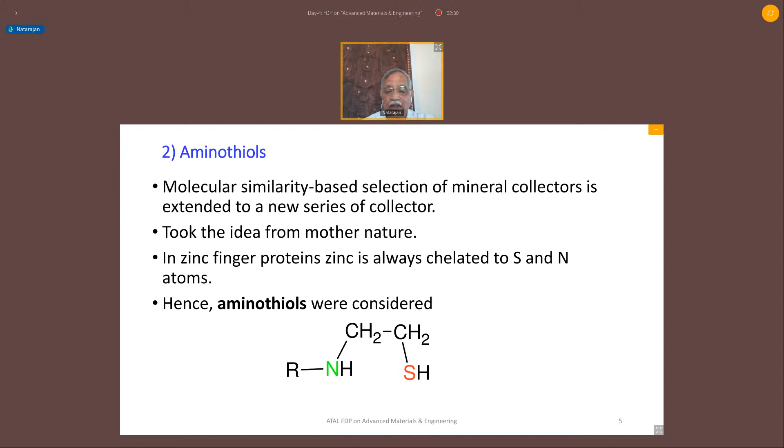This compound is called aminothiol. We created a database of about 200 compounds, did a similarity clustering, selected these compounds and tested them. We found that the aminothiol collectors we synthesized are very effective and very selective for zinc mineral.

They floated pyrite, but in very small amount, a small percentage. That means the pyrite contamination is less than what is achieved even in present mill operations. And the copper sulfate consumption is very much reduced, unless zinc mineral is suppressed for the flotation of some other mineral, in which case we need activation. Otherwise, even activation by copper sulfate is not necessary.

Therefore the new collector is very selective. We are able to float zinc effectively, and copper sulfate consumption is reduced. This new collector is patented, and we have received both the Canadian and the US patent for it. This is the best performer, which we call N-butyl aminothiol.

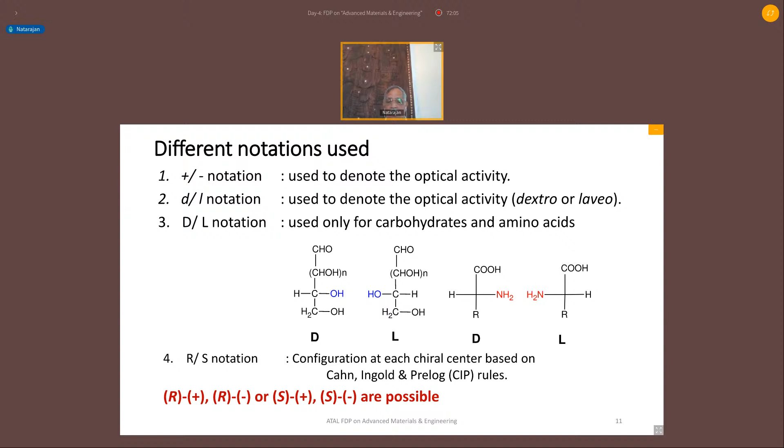Now, how do we assign the RS configuration? Let us imagine a compound: this is an asymmetric carbon with methyl, fluorine, chlorine, and bromine attached. Four different groups are there, so definitely this is asymmetric. Now we assign priority based upon the atomic number. The group which is bigger is given the highest priority. Bromine, which has a high atomic weight, is given priority number 1, that is A.

Chlorine is next, it is B. Fluorine is C. And going through the methyl group, the first atom attached to this center is carbon, which has atomic number 6, so it gets the lowest priority. Therefore, A, B, C, D is the priority order.

And if we take this example here: methyl, hydroxy group, amino group, and hydrogen are there. Between oxygen and nitrogen, oxygen has atomic number 8, nitrogen has 7, so oxygen gets priority, nitrogen comes next, then carbon and hydrogen.

To assign the RS configuration, the least priority group is kept away from our vision. That means group D is kept away, and we look at the remaining three. If A, B, C are arranged in the positive, right hand clockwise direction, we call it R. If they are in the left hand, anti-clockwise direction, we call it S.

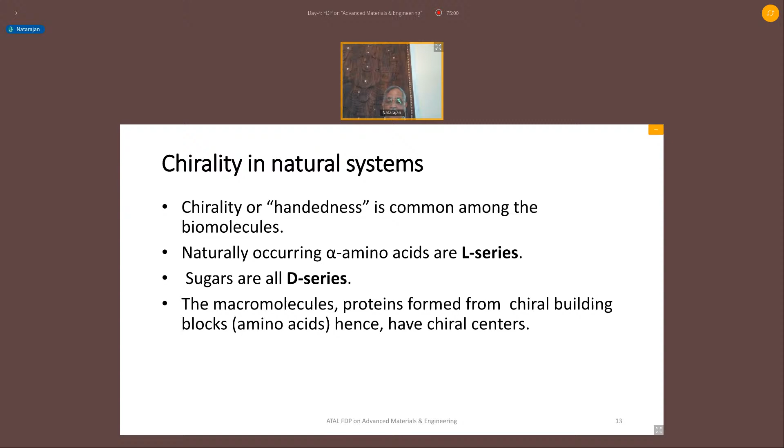That's why we call it D-glucose. D-glucose doesn't stand for dextrorotatory; D-glucose stands for having a D configuration. Therefore, the macromolecules, proteins, which are formed from the chiral building blocks of amino acids, also have chiral centers, and there are a number of chiral centers present in the proteins.

Enzymes are also proteins, and the prevalence of the preference for the same type of handedness of chirality, we call homochirality in natural systems. These macromolecules, as I said, are formed from amino acids, and all proteins bend, fold, and coil, and all these coilings are right-handed. The protein never has a left-handed coil; it always has a right-handed coiling.

In nucleic acid, the DNA molecule is made up of sugar phosphates and the four bases. DNA is again a right-handed double helix, so it has a preference. It's not having a left-handed rotation, it's having a right-handed coil. Natural systems always prefer to have either left-handed or right-handed; we cannot see both types of chirality in natural systems.

That means chirality is a biosignature of organic evolution. That is why any space mission exploring the possibility of life or evolution always carries a chiral probe that will first search for whether chiral molecules with asymmetric carbon are present in the atmosphere. If that is there, that means the process of evolution is going to take place. So chirality or handedness is a biosignature of organic evolution.

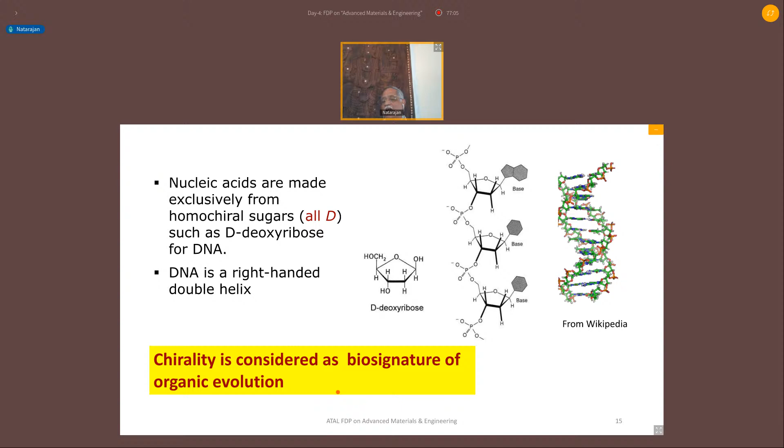How is it important for us in synthesis? Because, as I said, natural biological systems are chiral in nature. Therefore the receptors act as receptors when we take drugs, some of the molecules we take in.

For example, taste perception excellently differentiates the plus and minus isomer. I am not repeating every one of them, but if you take limonene, if it is the plus form, it tastes of orange; if it is the minus form, it tastes of lemon. So taste perception is very specific with respect to the stereospecific or stereochemical structure of the molecules.

Therefore physical and chemical properties of the enantiomers are the same, however they will be differentiated by biological molecules. So the plus isomer will behave in one way and the minus isomer will behave differently when it reacts. But in laboratory synthesis or in industry, when you do normal organic synthesis and make a chiral molecule, unlike in nature, we don't get a pure plus form or a minus form.

We always get a plus and minus mixture. We call it a racemate or a DL mixture, because D and L are present in 50-50%, an inactive mixture. But that means several drugs, which are all chiral molecules, that are synthesized and sold in the market are sold mostly as racemates. What is the problem when we sell racemates?

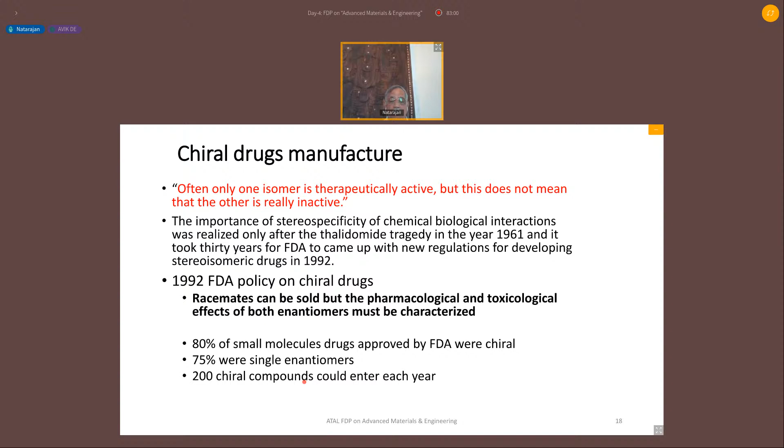Then, I like to introduce you to two terms that are extensively being used nowadays in the industry. One is called chiral switching, and another is repurposing.

So, FDA has said that racemates can be sold only when you come up with the toxicological profiling of both the S isomer and the R isomer. But now, several companies which have a patent for marketing the racemate, the plus or minus isomer, are coming up with only the active isomer, a single enantiomer drug, and in that case they are able to re-register the patent, and the patent is extended. That is why they are switching over from a racemate to a chiral enantiomer pure drug, and that is called chiral switch.

With COVID and other situations, now several molecules or drugs that have been used for a particular disease earlier are being used for other diseases. This is called repurposing. For example, if you take some of the drugs tested for COVID-19, I'm not going to go through every one of them, but Lopinavir, Ritonavir, all these compounds, these centers, they are all chiral molecules.

They are all chiral molecules. Chloroquine and hydroxychloroquine, these two are drugs used for malaria prevention, known as anti-malarials. But now, with the COVID-19 situation, they tried to use this. Therefore, a drug which is used for malaria is now being tried for COVID-19. This is what's called repurposing.

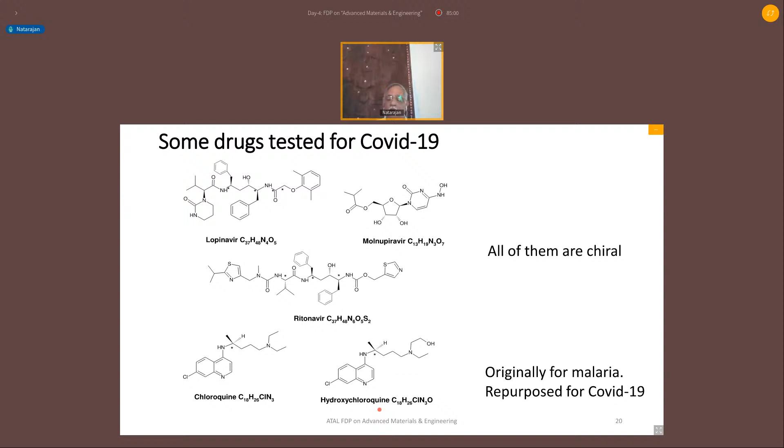So, chloroquine and hydroxychloroquine are repurposed. You may remember that India exported more than 10 million doses of hydroxychloroquine, abbreviated as HCQ, to several countries.

Now why am I giving you all this on molecular chirality? When we go for chiral molecules, we have to predict the toxicological or pharmacological property of these chiral molecules. And to predict them, we have to convert them into numbers. That means the molecular structure, not just the two-dimensional structure, but the three-dimensional stereochemical structure, has to be converted into a number.

This mathematical characterization of chirality is very, very important because the drug industry is going through a transformation to synthesize more and more chiral drugs. Structure-activity relationship descriptors are very essential.

Now, in calculating the chirality indices that we have proposed in our laboratory, we assign, like I explained how to assign R and S configuration, the same way we identify the 4 structures. The one which has got the substituent with the highest priority is A. The substituent with the next priority is B, then C. So the 4 groups attached to the chiral center are marked as A, B, C, D in order of priority. A has the highest priority, D has the lowest priority.

Now what we do is, for each of those atoms or substituents, we assign a weight. How do we calculate the weight?

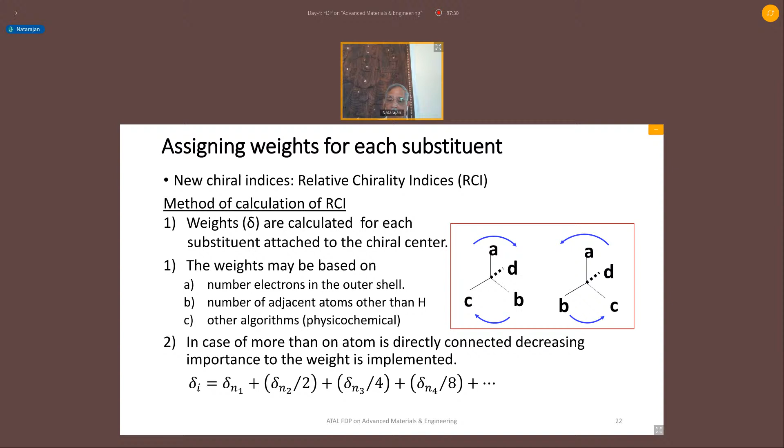So this compound is CH3OH, CH2, CH3. This is a carbon attached to 4 different chiral groups, therefore it is a chiral carbon. This is substituent 1, substituent 2, substituent 3, substituent 4. Now we have to assign priority.

We have oxygen — among all these, oxygen has the highest atomic weight, so oxygen gets the priority. Between these two, this carbon has two carbon atoms attached, so it gets the next priority, and this gets third priority, with hydrogen having the least priority. Therefore A, B, C, D are the assignments.

Now how do we assign the weights? This oxygen is delta. I'm giving you just one example of how we assign the weight. For this oxygen group, we assign the weight using the letter delta. Delta equals the number of electrons in the outermost shell minus the number of hydrogen atoms. For oxygen, the number of electrons in the outermost shell is 6, minus 1 hydrogen atom, so the weight of this group is 5.

Similarly, we calculate the weight of this group. Carbon has 4 electrons in the outermost shell, so 4 minus 2 is 2. And this one is 4 minus 3, which is 1, so it's 1. But while this carbon contributes 100% to the chirality index, this other carbon is 1 carbon away from the center, so it contributes only 50%. This is marked here. Therefore the weight for this group is 2 plus 1 divided by 2, which is 2.5.

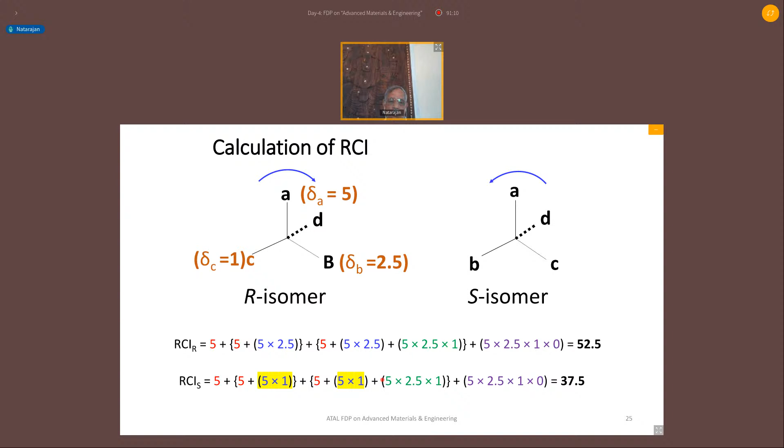For the R isomer it is 52.5, and for the S isomer it is 37.5. This means the new chirality index we've proposed is able to distinguish between the R isomer and the S isomer, and it can be used for several other compounds. For example, someone might ask: you're talking about a molecule with only one chiral carbon, but what if the molecule has 2 or more chiral carbons? What will you do?

Calculate the chirality index or relative chirality index for each chiral center. Take the square of chiral center 1, square of chiral center 2, square of chiral center 3, divide by the number of chiral centers, and then take the square root. In short, this means we take the root mean square of the RCI values, the relative chirality indices, for the various chiral atoms in the molecule.

Cysteine and serine have similar structures. The only difference is sulfur versus oxygen. Sulfur and oxygen belong to the same group in the periodic table. Therefore, these types of groups are called isosteric, meaning they have similar bulkiness. Steric means bulkiness, so isosteric molecules have similar stericness.

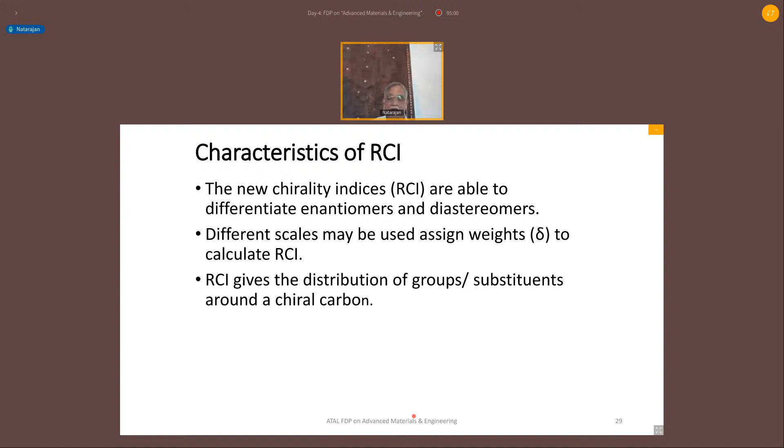The receptor in mosquitoes, the odorant binding protein, is responsible for sensing odors. Mosquitoes attack us by sensing carbon dioxide, ammonia, lactic acid, etc. emanated from our body, which serve as cues. When this molecule sits at the odorant binding protein, it confuses the mosquito and drives it away from us. That's why it is a repellent.

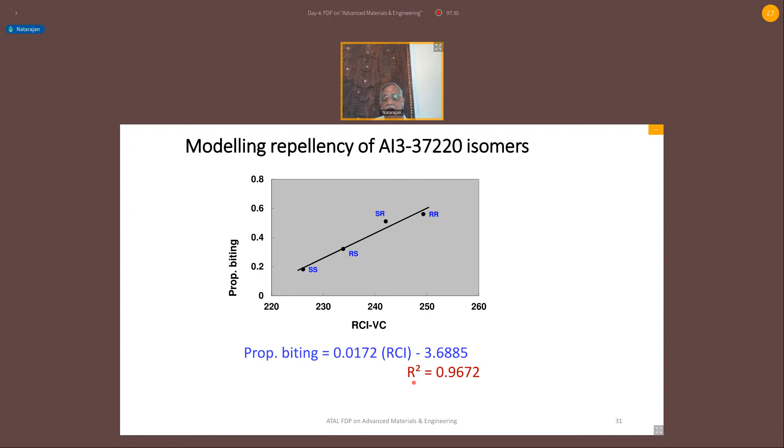Using the descriptor, we are able to form a regression model. The proportion of biting by the four stereoisomers is given by a linear equation using the chiral index, with an R square of 0.96 -- a very good correlation coefficient. This shows that the new chirality index, called the relative chirality index, can be used for prediction of properties of stereoisomers.

This means we can form quantitative stereostructure activity relationship models, and the relative chirality index can be used on different scales. Once you identify which chirality index scale correlates well with the property, that gives an indication of what type of handedness the chiral receptor is looking for, enabling computer-assisted prediction of new drugs or biological activity of chiral molecules. This type of numerical characterization of chirality will help greatly in synthesis of new chiral drugs.

Before I conclude, I'd like to say that this is a fundamental chemistry concept, being presented in a program of engineers. But this fundamental chemistry concept will lead to new areas where we can contribute.

One possible area is that the pharmaceutical industry is looking for synthesis of chirally pure compounds, but normal laboratory synthesis always yields both plus and minus isomers. Chemical engineers can come up with new catalysts that allow synthesis of only one stereoisomer, either plus or minus. So catalysts for chiral synthesis or asymmetric synthesis is one area.